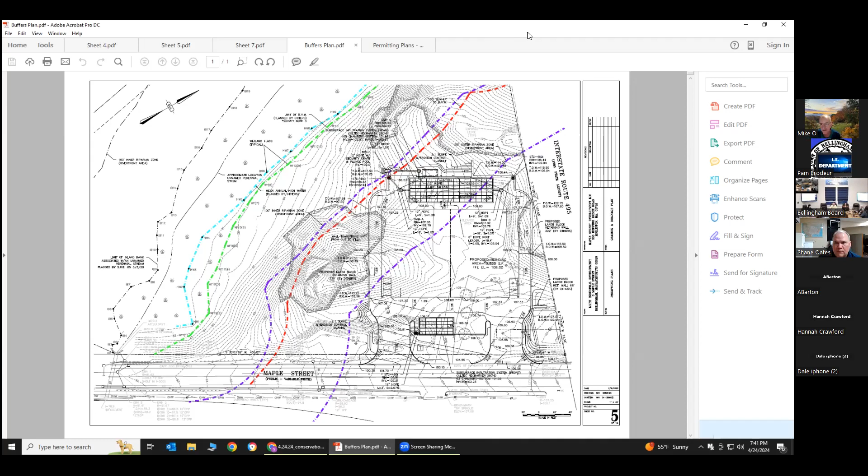Shane, could you go to the snow pile removal areas on the back side of the site please? I have a quick question. Sure, they're right here. There are two of them, correct? On either side of the dumpster, that's correct. So the one on the left is going to be right on top of the drainage structure outflow, correct?

This is just from here - it's on top of a pipe which has plenty of cover. Let me zoom in. It does slope down away from that area.

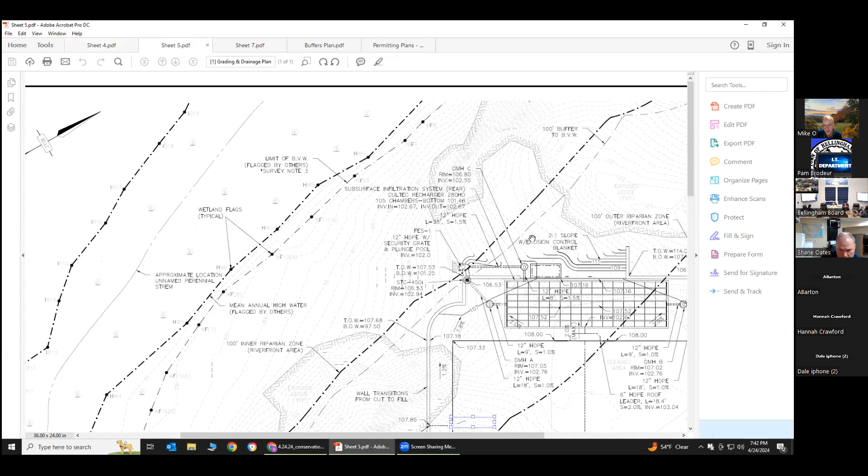So the back side of that parking area, it looks like a curb perimeter area. So snow plow removal or snow plowing up on top of a curb, over a curb with no barrier beyond, and a hill going down. Do you have a plan to put some sort of - I can't see the detail on there - maybe a guardrail on the back side of the snow removal area to keep stuff from just going downhill that has some ice melt or oil on it or whatever?

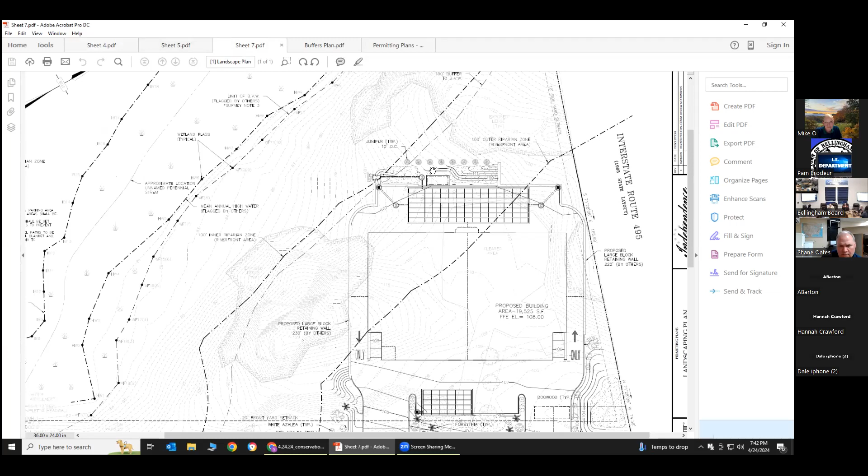We could, yeah. I'm almost wondering, given the concern about this area, maybe we push this landscaping over and down a little bit. These are just some junipers for aesthetic purposes - there's no visual line of sight for any of the abutters, here's the highway. So we could even move this and increase this area, make this a mountable curb, and remove this entire area here.

Because now that I'm looking at it, I don't think a lot is gained from this, and it's probably the most sensitive portion of the discharge area. Not only the discharge area, but generally with snow removal areas for parking areas, we try to keep them away from the top of a slope that's going down into a wetlands if possible.

And if it has to be something like that, then we want to make sure the snowplow operators aren't just tempted to pile it up and push it out of sight, out of mind - knowing these snow piles aren't perfectly clean, they've got oils and other sediments. So if there's a way to keep - they're not even a little clean - so not using those two at all would be great, but if they have to have them, then having something to backstop them so they can't go beyond a certain point, especially at the top of a slope, is going to be critical.

The junipers, I don't think will help do anything for that, but some sort of railing system, or indicating in the maintenance plan that they must fill the front part first. We could probably do that - clear the front. What we've done in other situations like this, we could come in here and show a little post and rail fence, just so there's a demarcation of, hey, you shouldn't go past that area.

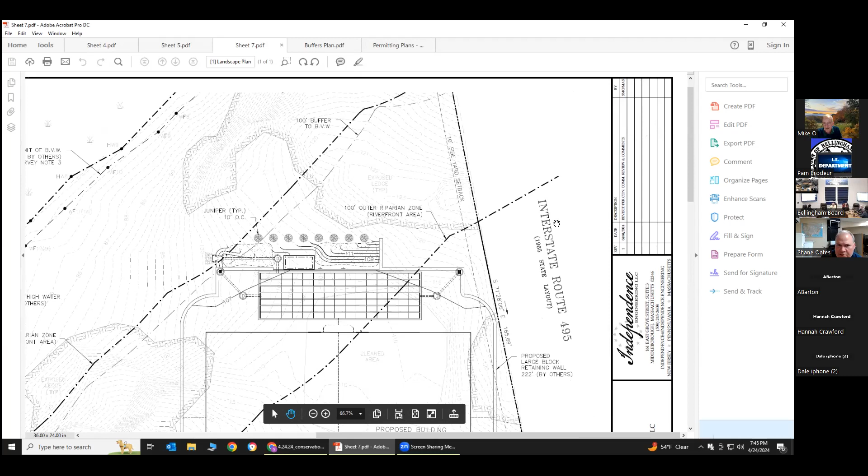But the plan itself, further down on that plan you're showing, has a date of 2/9/24. So the 4/4 plans are what we're seeing, even though that original date was on there. Correct—these are the last revised plans, and this is what the planning board will see tomorrow. So one of the conditions we always like to make sure of is that the planning board plans and ours are the same, so they would be the plans of record. That's good.

Okay, I don't have any other questions on this particular item. And I believe we would be ready, based on planning board approval and no changes, to proceed with an order of conditions, if that's the desire of the commission members. And if so, they can indicate by letting me know they would like to make a motion to do so.

Motion to do so what? Proceed, continue this to the next meeting, and prepare an order of conditions based on approval of the planning board and no changes to the plans.

So moved. Seconded. Okay, thanks—for the record, hopefully whoever is recording can hear who it is, because I can't tell from the picture. Any other discussion? This has been continued to the meeting of May 8th at 7 p.m.

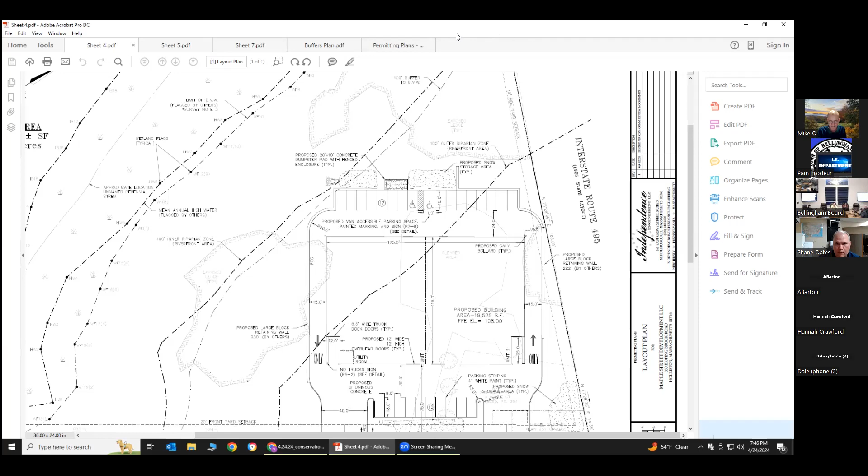No other discussion, all in favor? Aye. Aye. Aye, Michael Heron online. Aye, Ariane online. Thank you. Unanimous vote.

Thank you, Shane, appreciate it. Thank you, everyone. Have a good evening. You too. Thank you.

Okay, moving along to the next item on the agenda, notice of intent, continued hearing for Blackstone and North Street. This is a prior project which has been continued for some time, but it looks like we have some new information and a new set of plans to be reviewing tonight. This was originally a 12, 3-unit townhouse development with buildings and a stormwater management system. John Mashurian is the applicant and Ryan Rosine of Goddard Consulting is the representative.

I do have a question, and I know this has come up before—when a project changes like this, Neil, you can help me, because you've done this with me. We don't change the project description, even though this new proposal we're hearing tonight is not for 12, 3-unit townhouse units. That doesn't void the fact that we're hearing a change, or we don't need to change the description going forward, correct? No, because that's how the filing was done—it's still the same filing. Okay, just for the record, that's good to know, even though my ignorance is shown forth there.

Okay, Ryan, or anyone else presenting tonight? Yes, is this a good spot for this up here? Looks good. Okay, good evening, Ryan Rosine with Goddard Consulting. With me is Mike Hassett from Guerriere and Halnon.